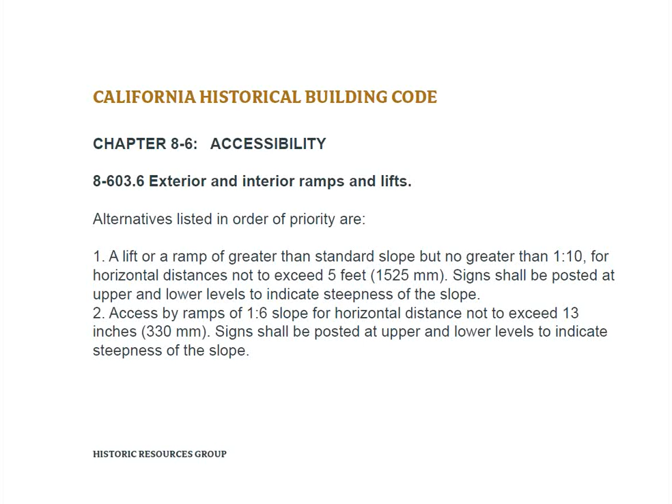On the other hand, while we had some new accessible toilets, we had non-conforming thresholds at an existing toilet where we added a steep ramp, but we added the warning that there's an excessive slope there. So if a person who's a wheelchair user approaches that, they're warned. They don't just come up on a 1 in 6 ramp and get surprised and possibly roll over backwards.

The concept of equivalent facilitation: use of other designs or technologies is permitted if the application of the alternative provisions contained would threaten or destroy character. Alternatives are applied only on an item-by-item or case-by-case basis. They are provided by experiences, services, functions, materials, and resources through methods including but not limited to maps, plans, videos, virtual reality, and related equipment at accessible levels.

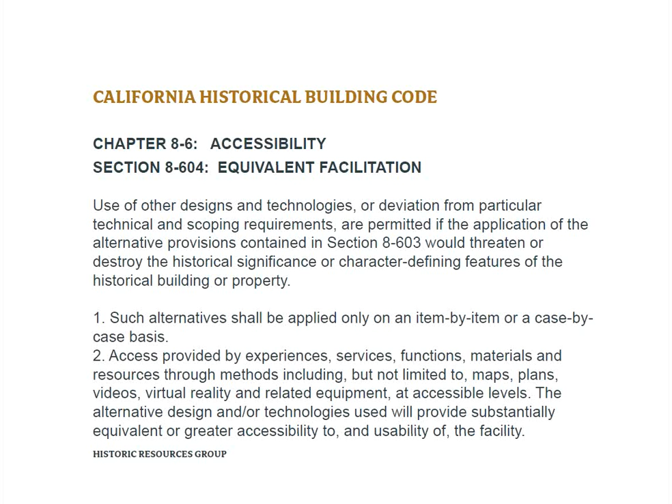Third item under equivalent facilitation. The official charged with the enforcement of the standards shall document the reasons and their effect on historical significance or character-defining features. It must be documented that there's an impact and therefore a justification. Documentation shall be in accordance with item 2 above and shall include the opinion and comments of state or local accessibility officials and the opinion and comments of representative local groups of people with disabilities.

Many cities have accessibility commissions. Some cities have, in addition or aside from, local nonprofit or advocacy or educational groups of people with disabilities who should weigh in, who should be consulted.

Our first case study is in Pueblo De Los Angeles, a particular building that was first constructed in 1875, but has had many alterations and additions.

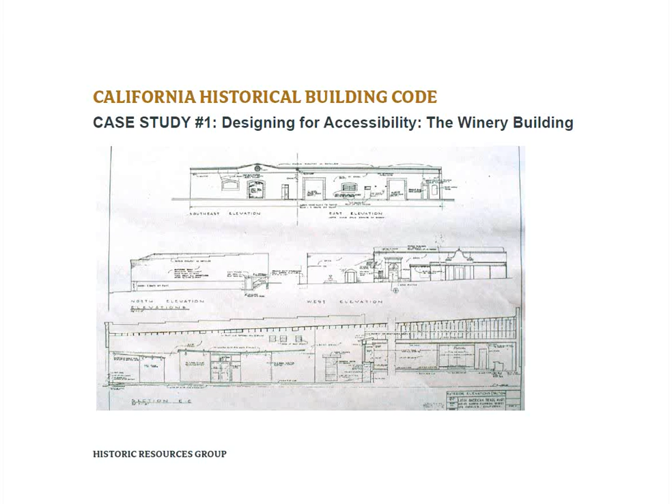These are the archival drawings, and an as-found floor plan shows a particular suite here, which is actually the only really character-defining part of this building. Even though much of its shell goes back to 1875, very little except for the brick walls from the inside and this suite reads as a character-defining material or space.

We have accessibility problems here. There are stairs at the main entrance, more stairs in the major passageway that gives access to tenant spaces, and steps at another entrance. There are also steps within a restaurant space used by many visitors, both tourists and locals.

The solution here was an interior addition, an architectural interior design solution placed in an area where there was no historic fabric, solving many problems in terms of providing accessible toilet facilities, dressing rooms, and mobile access for wheelchairs to many different floors of the building.

First, in the passageway where there was basically no historic fabric, we intervened by adding a ramp and a mechanical lift where these stairs are located.

This darker double line represents a very long corridor with ramps and landings that provides access to a number of different levels within the building.

That ramp space is entered by this large landing space. It ramps down to the entrance to toilets and dressing rooms, then ramps down again to the other sex's toilet and dressing rooms, then ramps down to the main floor level through an existing doorway in this historic office suite.

Next, another ramp enters through an existing doorway into a lower level of this historic office suite, and finally it ramps down to a landing at sidewalk level.

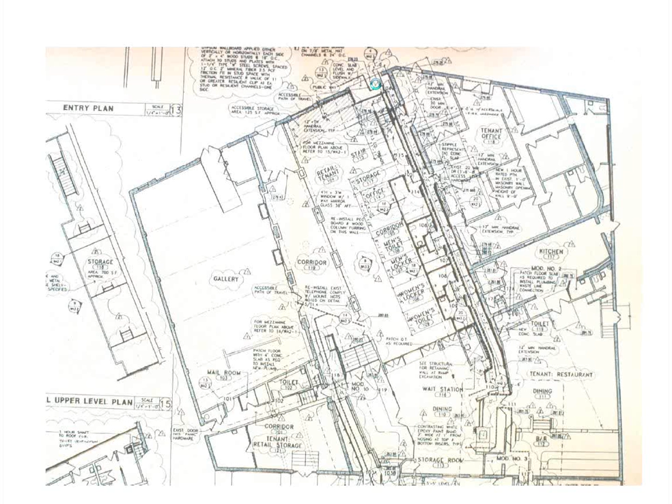Case study number two is a historic library building now on the campus of the University of Southern California. Stonier Hall was originally, in the 1920s, the City of Los Angeles Public Library, and later became the property of the university.

In the meantime, it has served as offices and as a departmental library for the university, and most recently it has been adaptively reused for a new university club, which is a private faculty club.

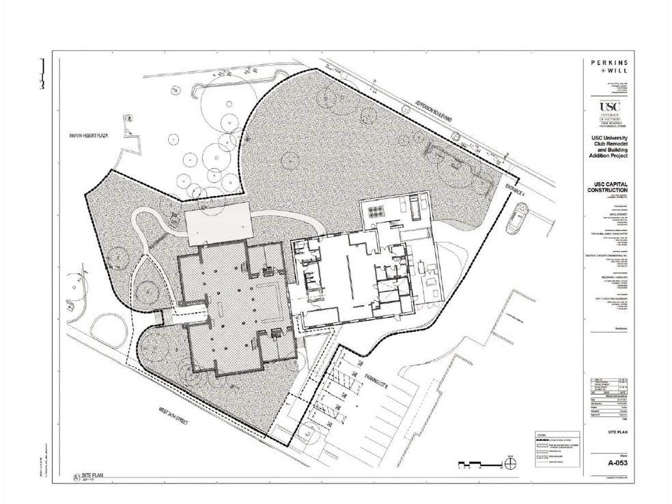A little bit easier to read here on the landscape plan. We have ramps that lead up to coming in on the side of an extended landing and continue to an outdoor terrace, and then continue to the kitchen facility, and a ramp on this side that leads from the public sidewalk up to a rear entrance. On the first floor, the main level, it's a little bit clearer that this is an elevator and these are the toilets.

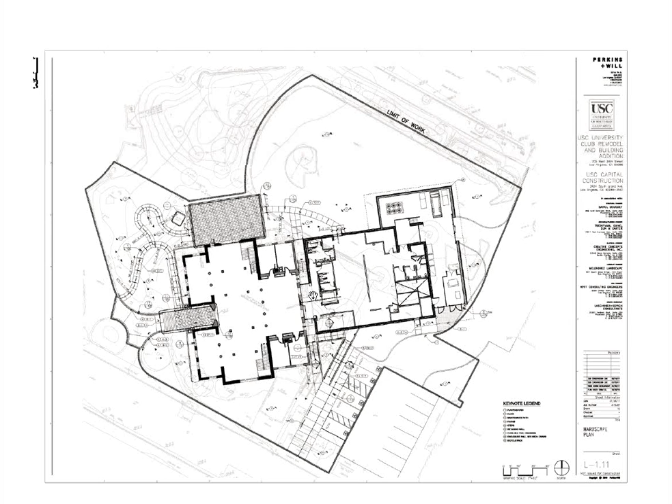The detail through the main entrance is a reversible addition whereby we added new paving, raising the actual floor deck area to accessible threshold height and extending the landing out here, but maintaining the original stairs under there so that the historic fabric is encapsulated, and this is a substantially reversible addition.

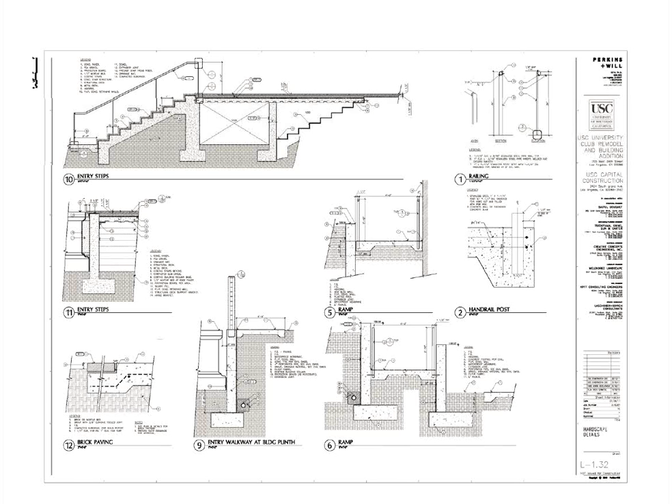At the upper level, there's a mezzanine for private dining. That is accessible via this passageway and the new elevator, but the elevator is pulled into the addition rather than being located within the historic building. In our elevations, the historic building is on the left. This is the glazed hyphen, and Peyton? This is the addition, and this bump here is...

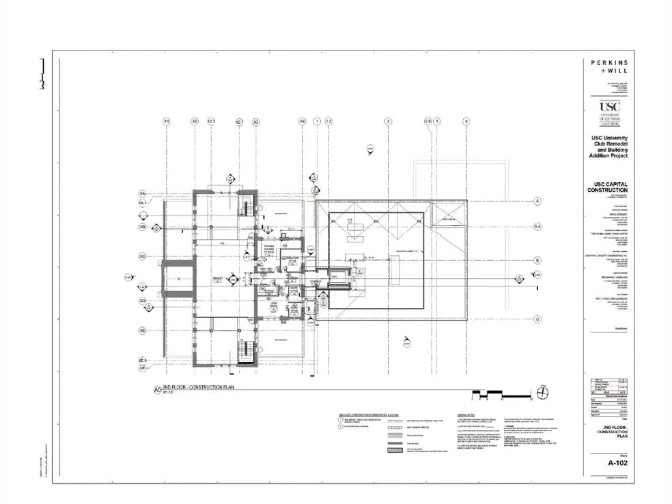Peyton, yes. Can you highlight again? The transition between the slides is a little bit of a delay. Can you highlight again where the historic and the hyphen? Yes.

The unpochéd building on the left is the historic library building. I'm now pointing to the glazed hyphen, which is the connector between the old building to the left and the new building to the right. And at the bump up on the new building is the elevator overrun, just showing that the stairs and the elevators are in the new building, so there's no impact on the roof or walls or openings in the old building.

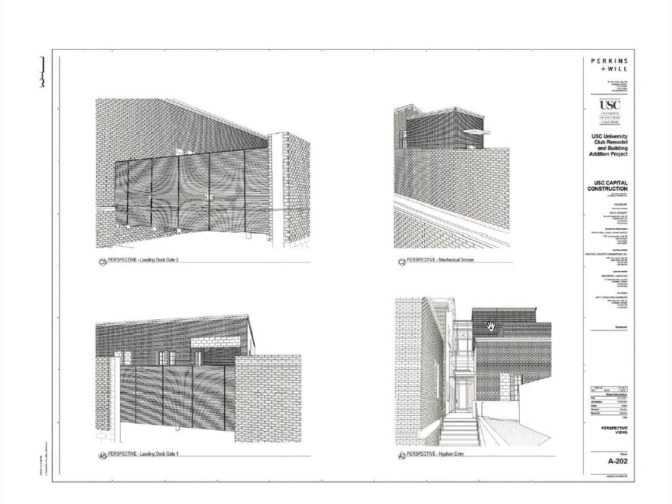Some years ago, I was in Colonial Williamsburg, which is a large historic park with many historic buildings in the 1920s, and even the 1920s buildings now have been listed on the National Register. Colonial Williamsburg, for all of its good intentions in terms of historical education, was placed under a compliance order by the Department of Justice very early on after the passage of ADA, because they were not providing good access to their visitors.

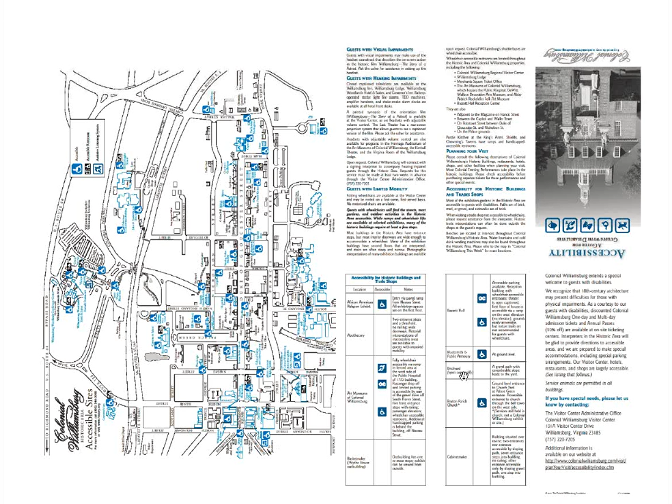So this would be a really good example of how to give people information that will help them visit your site if they have disabilities.

Coming close to the close, there's a provision of CHBC that speaks to alternative minimum standards. The alternative minimum standards for alterations of qualified historical buildings or facilities are contained in the stated section of ADA standards for accessible design, 28 CFR 36. So this is a clear connection between our state code and ADA.

And that cross-reference, which I have quoted here, is a very short, simple list. Not that the summation of what we do in situations like this is simple, but here's the list: B, at least one accessible entrance. C, if toilets are provided, at least one toilet facility. D, accessible routes from an accessible entrance to all publicly used spaces on at least the level of the accessible entrance. And E, rules for displays and written information.

I have used these alternative minimum requirements in a local jurisdiction CHBC application, where it really helped me and the building official clarify: if we are adaptively reusing a Victorian house for an office, what should our approach be? What's the minimum we can do to make this work? That is to get people to the front door, get them through the front door, provide them with a toilet, and provide them with ways to get to the publicly used spaces in the building. We hope it's a lot more than that, but we couldn't imagine a building being acceptable for people with disabilities without at least providing these things.

The decision process was having the City of Los Angeles Office of Historic Resources jurisdiction over approving proposed work on a qualified historical building. In this case, it's a contributor to an eligible California register district, and the challenge was to keep the historic fabric of the original stairway and to provide accessibility. And this was the solution that was arrived at by the architect and consultants in consultation with the city jurisdiction. I hope I answered the question. Thanks.

Please explain equivalent facilitation and the consultation with local groups. Is this consultation required every time alternatives are used? I have found in my experience that many very common or frequent issues of regular code versus alternative code are handled administratively by, for example, a local planner who writes a modification to the code and justifies a 29.5-inch opening versus a 36-inch wide opening, for example.